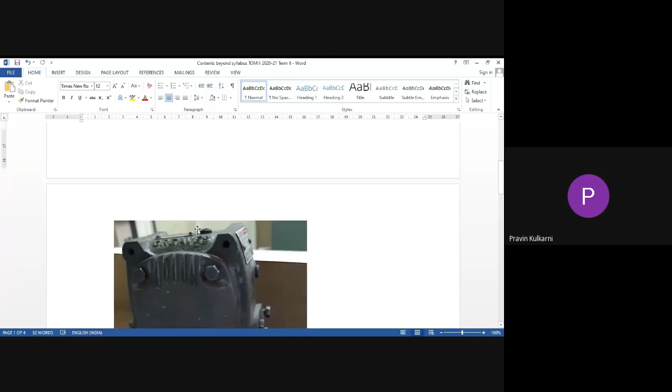So this is a gearbox, a worm gearbox. Right now you are able to see the casing of the gearbox - this is called the casing. And here you are able to see a shaft in the plane of the computer.

Remember that worm is driver, wheel is driven. So this is supposed to be the driving shaft - somewhere here, motor is coupled to this gearbox. You are able to see these bolts - with the help of 4 bolts, the bearing cover is fixed. This is called the cover of the bearing, and inside the cover is actually a bearing. So front bearing and rear bearing for the wheel, and this is the bearing cover for the worm - 2 bearings for the driver, that is worm, 2 bearings for the driven.

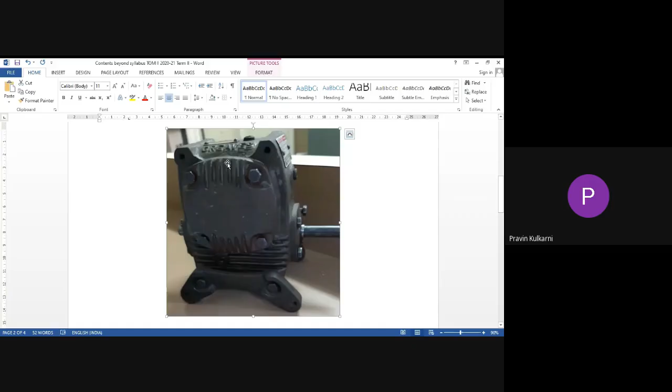Now, ultimately worm is smaller in diameter, wheel is larger, so the large bearing cover gives you an idea of the wheel which is present inside this portion. Now people normally make use of a split casing, but this is a one piece casing that we shall see.

Now you are able to see the projected parts like this, the projections. You're expert in heat transfer now, so these are actually fins - FINS - for dissipating the heat generated in the gearbox. Remember that efficiency of the worm gearbox is very low because of high friction - high sliding is there, greater friction, sliding friction. That's why heat is generated, which is to be dissipated with the help of the fins.

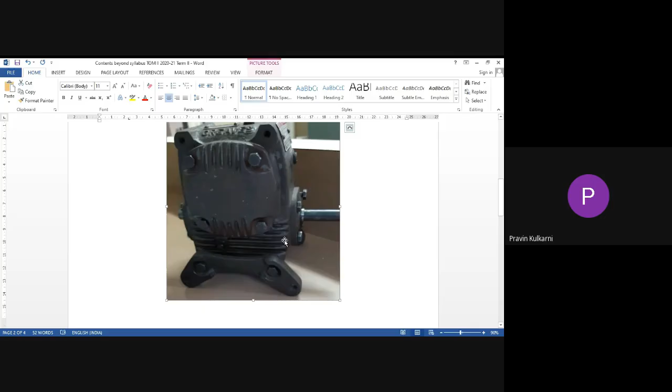Now I have already dismantled the gearbox for you, so different parts of the gearbox are here. This one is actually the worm, which is the driving member, isn't it? Remember that as far as the worm is concerned, the worm and the shaft are integral - in case of the worm, that itself is the shaft. So on that shaft, 2 bearings are mounted.

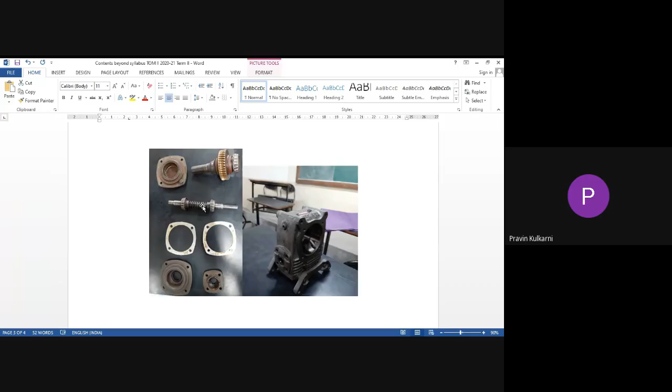Now again, selection of bearing and design guidelines for bearing will be covered in DME 2, design of machine elements 2. Let me enlarge this because you might be using your mobile phone, that's why it may not be properly visible. Now you're able to see the worm and the bearings.

So again, which bearing is to be selected, like which gearbox is to be used? Similarly, which bearing is to be used to support the shaft? Every selection is to be justified by calculations - not that randomly X bearing is to be used or Y bearing is to be used. We are engineers, we are physicists. We will always support our selection or judgment backed by calculations.

Application of science is engineering, and application of engineering principles gives birth to a product which is engineered. So remember that all these components are engineered components, isn't it? So while selecting this bearing or that bearing, some calculations are needed, isn't it?

If you ask me different types of bearing, then we have got deep groove ball bearing, roller bearing, taper roller bearing, angular contact bearing, needle roller bearing, cylindrical roller bearing - the list is huge. Probably BAJA and SUPRA students might be having greater knowledge of this thing. Now, few bearings are capable of taking radial load only, and there is another class which will take radial as well as axial load.

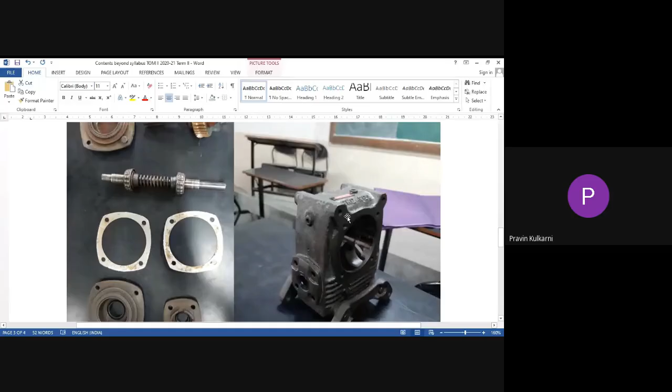Now see, this is actually the bearing cover for this wheel side. This is the bearing cover for the driving side, that is the worm. Now see, more important is the wheel. You are able to see the shaft of the wheel. In case of the worm, shaft and worm are integral. In case of the wheel, you have got a separate shaft on which the wheel is mounted.

Now remember that in case of the wheel, it is made in two pieces. You have got a central cast iron hub on which a rim made of phosphor bronze is mounted.

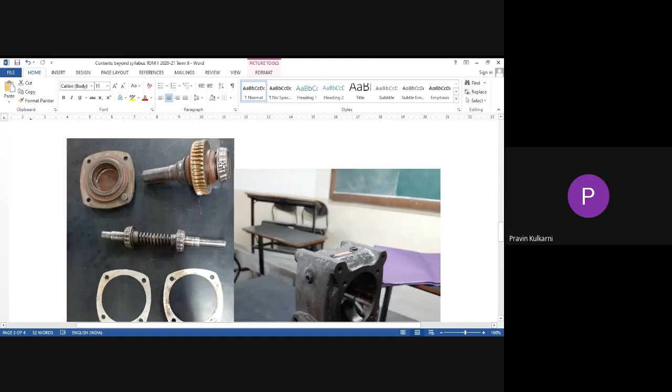And then you have got the bearings. These are the elements. And then we have got this casing of the gearbox. This is a single piece casing.

You may make use of a split casing, that is upper half, lower half. But in this case, what is done is the opening of the gearbox on the wheel side is slightly greater than the diameter of the wheel, isn't it? So how to dismantle this?

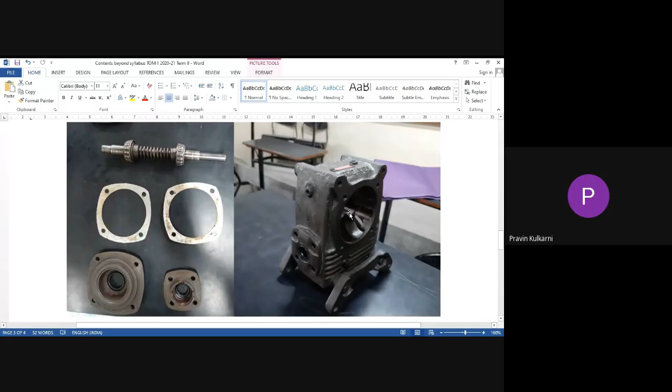Take out the bearing covers from driver and driven. So this is now opening, isn't it? You can take out the worm. Deliberately, the opening on the wheel side is large so that the large diameter, large size wheel can be taken out. Due to this large opening, we are able to use a single piece casing, isn't it?

Details we draw so that the components can be fabricated. But remember that when you draw a detailed drawing, each dimension should be specified. If a single dimension is not specified, then ultimately the person on the shop floor will not be able to carry out the fabrication. Each minute detail should be mentioned in the drawing.

Assembly drawing is meant for making assembly of the components once they are fabricated, isn't it? See, the thing is that when you go to industry and you are given the task of design engineer, there will be people supporting you, working under you, and those are ITI draftsmen.

Remember that ITI draftsmen are very expert in reading drawings and drafting in AutoCAD, because an engineering student will learn theory, many subjects, probably 10 into 40 subjects.

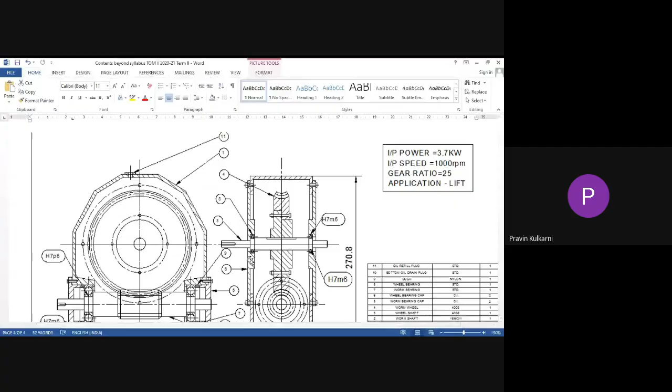I don't continue beyond this level, that is lift one gearbox. Overview of the gearbox is over. If any doubt is there, please revert back, I will wait for 2 minutes.

So today's first task is over, that is content beyond the syllabus. So let me close this. This matter is discussed.

Now, when you refer to the syllabus of each subject, some statements are mentioned in the syllabus. Those are called course outcome statements, CO statements. Remember that here 'course' stands for a subject, and 'outcome' is outcome, what you have gained, that is the outcome.

Outcome of examination will be how much marks you gained at the end of the exam. Outcome of engineering can be measured in terms of the employment you get, the package you will get, how good you as an entrepreneur would be, how good your business will run. That is outcome of engineering, or the university that you will be admitted to for your higher education, that is outcome of engineering education.

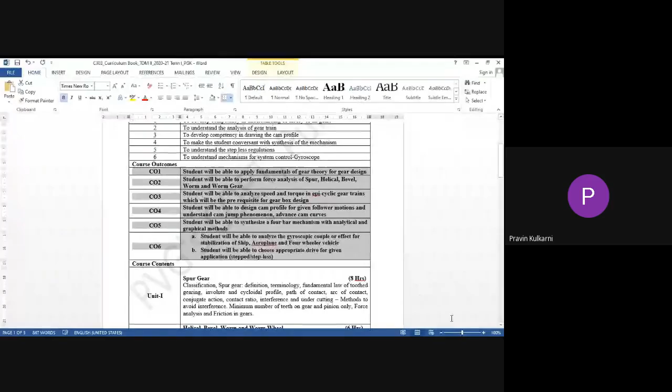So these are the course outcome statements for Theory of Machines 2. The thing is, we are following outcome based education, and have been for many years now.

So accordingly, what should be the outcome at the end of first unit is described by CO1. What is CO1 statement? You will be able to apply fundamentals of gear theory for gear design. Fundamentals of gear that you have learned can be applied for designing a gearbox for a lift, a machine tool, or any application like conveyors.

Unit 2 was based on helical, bevel, and worm gears. Accordingly, the second statement is ability to perform force analysis of spur gears. Yes, you can do it. Force analysis of helical and bevel you have to learn probably; worm we have done. That's the third unit.

Yes, you are able to now analyze speed and torque in epicyclic gear trains. We have gone through many numericals and had one experiment based on this, isn't it?

Unit number 4: yes, you are able to design cam profile for given follower motions and understand cam jump phenomena and so on. You are able to synthesize a 4-bar mechanism; many of you might have drawn the drawing sheets. Finally, you are able to analyze gyroscopic couple or effect for stabilization of ship, aeroplane, and so on.

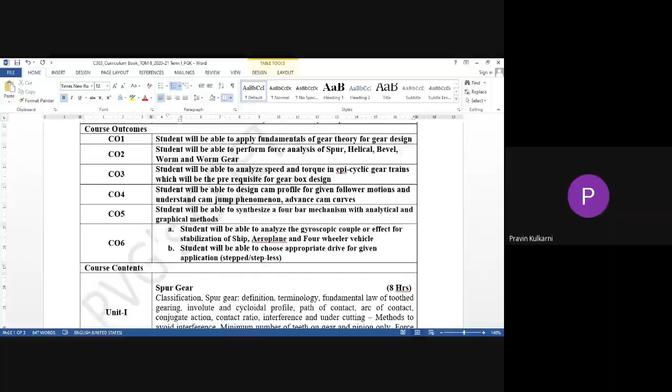Now, these are the statements, but the outcomes should be measured. That is important; simply showing you the statements will be half the task. So what I will be doing is, I will prefer to know from you how much you understood unit number 1, unit number 2, and so on. That feedback I'm going to take today, right now.

Now you have to be very honest. I am just asking you the extent to which you have gained knowledge. Don't say you have understood to the fullest extent; it may vary from person to person. You can say, for example, I have understood 50% of the first unit, 60% of the second unit, and cam profiles 100%. That is left to you. So be honest, and give the feedback based on whatever you have understood.

Nothing is compulsory; it's not that 3 is the highest rating you must give. 3 means yes, understood fully; 1 means lesser understanding; 2 is moderate. Nobody is going to check what A has done, what B has done, what C has done. You have to do it, that's all, nothing else. Okay.

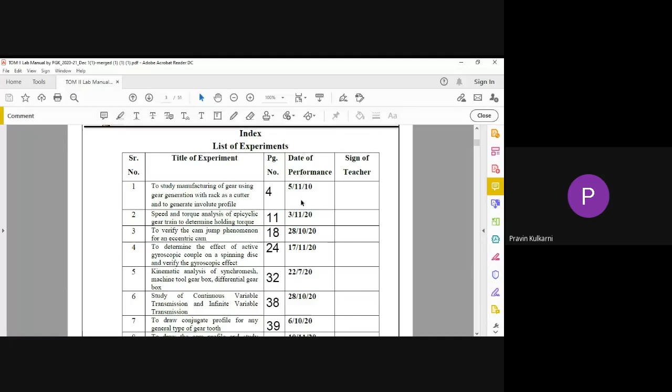Now, what I have done, you remember, dates I have already written. So on this page you have to write the page numbers, and you know what the page number is. Only thing is that for 1 to 6 we have got the write-up, okay, so accordingly numbers are already put there.

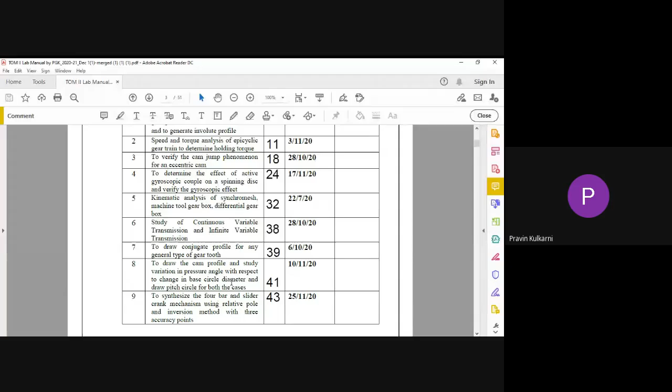7, 8, 9 are the sheets: conjugate, cam profile, and synthesis. Okay, so do one thing: you have got up to 6 the write-up given to you as a PDF copy. What you have to do is, for sheets 7, 8, 9, once you draw them, scan as a single PDF. I repeat, sheet number 7, sheet number 8, sheet number 9, once you draw it, scan as a single PDF. Now you have got 6 write-ups as one PDF, and 3 sheets as a second PDF.

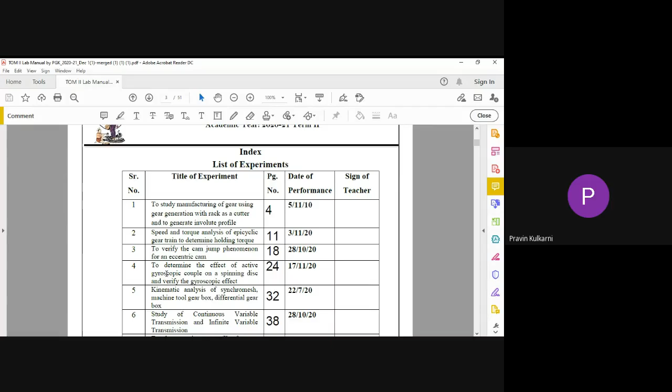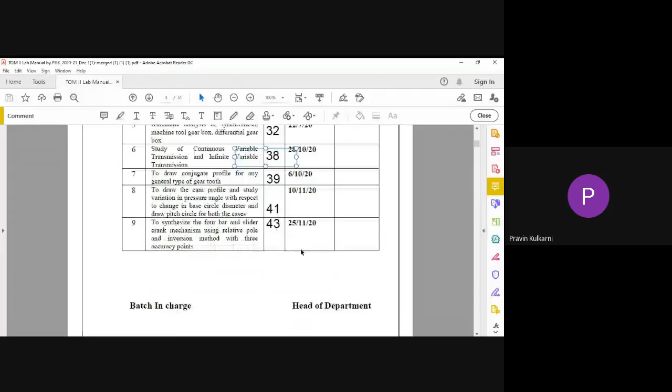You have to merge these two. Okay. Now put page numbers on the drawing sheet also, and accordingly transfer those numbers here. Okay, so this is to be done. Once you do this, then you have got either 51 or 52, whatever is the total number of pages.

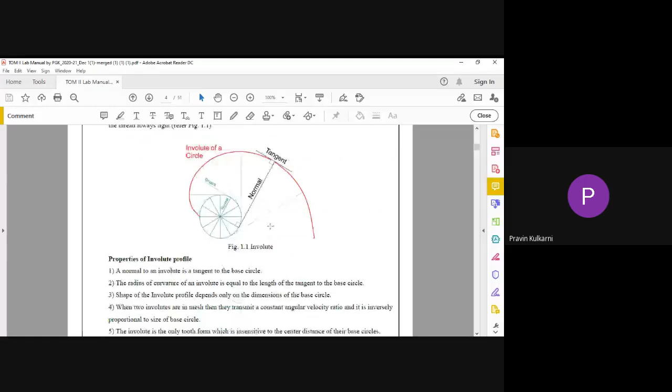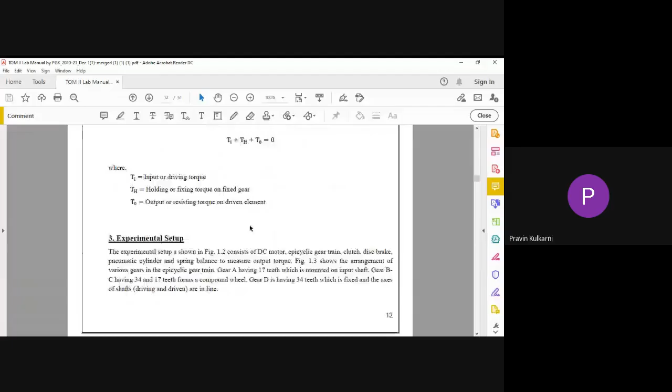Nothing is to be done for 1 to 6, everything is already there, isn't it? This is already done, this is with you. Number 2, it is already there. Everything is there, along with the calculations, along with the table, along with the outcome, output. This is already with you. Nothing is to be done, my dear friends.

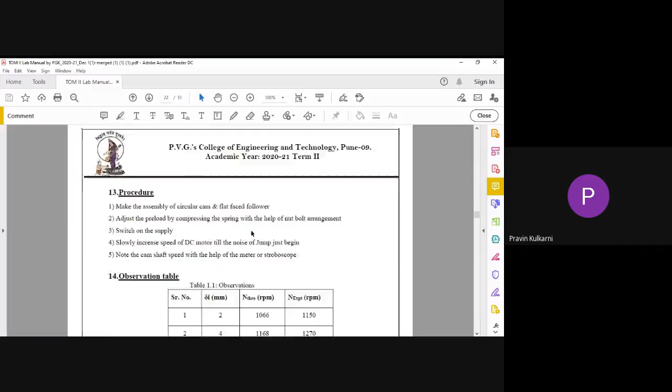Number 3, everything is there. You have got this observation, sample calculation. Remember that these are all our readings, we have taken this year. Just remember this 1066, this was the theoretical RPM.

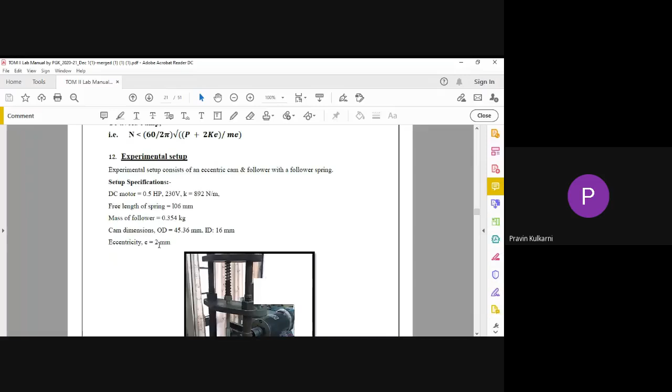How, what did we do? We have the observations: DC motor 0.5 HP, stiffness of the spring was 892, free length was 106, mass of follower is 0.354, eccentricity 2 millimeter. And we have got this formula for the jump speed. Based on this, remember that for 2 millimeter deflection, the theoretical speed was 1066 RPM. Just keep in mind, the first RPM that is going to be useful.

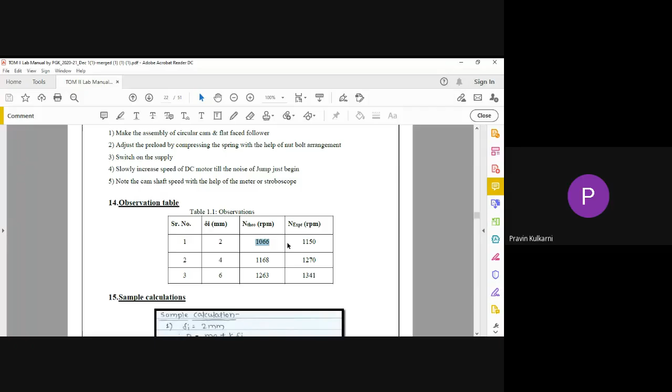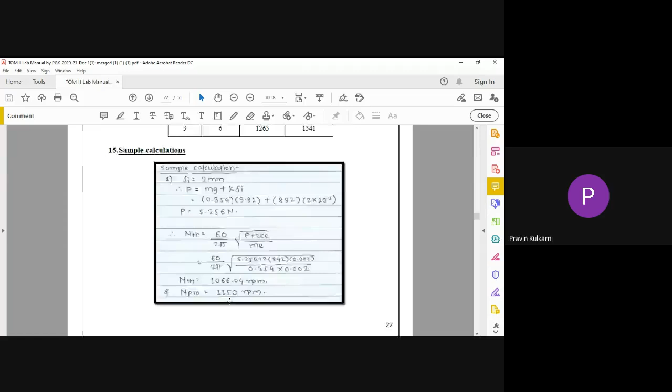1066 is the jump speed. Don't forget this. Accordingly, calculations are shown, this you can read afterwards. What is the jump speed? 1066 RPM for 2 millimeter deflection.

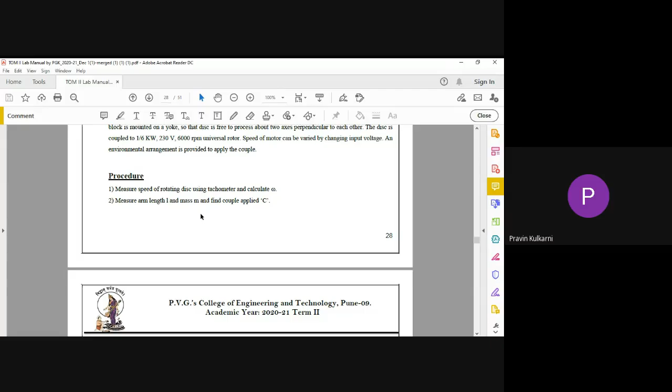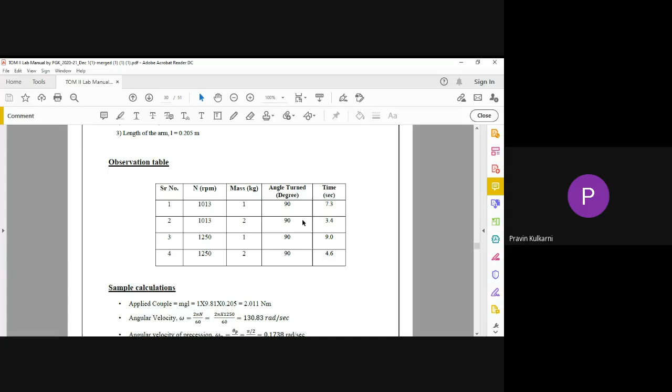Then gyroscope. Again, everything is there, one should not worry about Term 2 submission. I have to write this, I have to write that, because I also understand that you have got 5 subjects, heavy submissions, lesser time, you do not meet with your friends, everything is online. But not to worry about Term 2, everything is there. You have to devote a lot of time for study. You have to study this, that is more important. Writing is not important. Understanding these signs, remembering is more important.

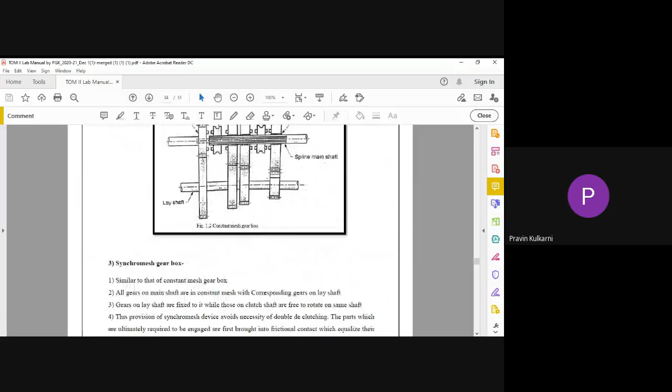That's why everything is there. Okay, then you have this result. If these gearbox study experiments, it is left to you, you can understand this, there should not be any problem in this. And this is CBT, yes, nowadays we make use of CBT. Just read out this, all is theory.

Now, 44 pages are with you as a single PDF. The second PDF, you will scan these 3 sheets. Don't forget to write conjugate as the 7th experiment. Title is to be written. This is to be done online. Once you merge these 2 PDFs, then you will be having this as blank.

The top will be blank. You will be having the sheet. Above that, write experiment number 7, title of the experiment as per the syllabus or as per the first index that you already have. This is very important, you must write this. And write this also, your name, number and division, conjugate.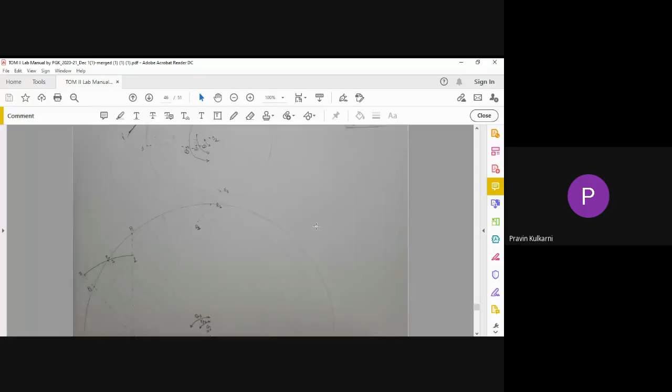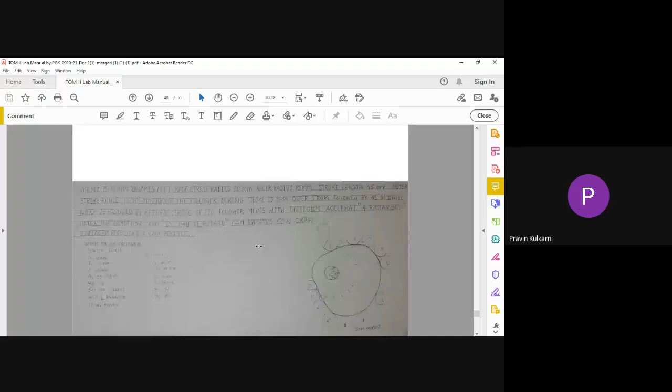Then you have got CAM profiles. Again, you have to write this online using some tool over here. Experiment number 8, title as per the syllabus. And experiment number 9, title of the experiment and this thing. That will be the end of the file.

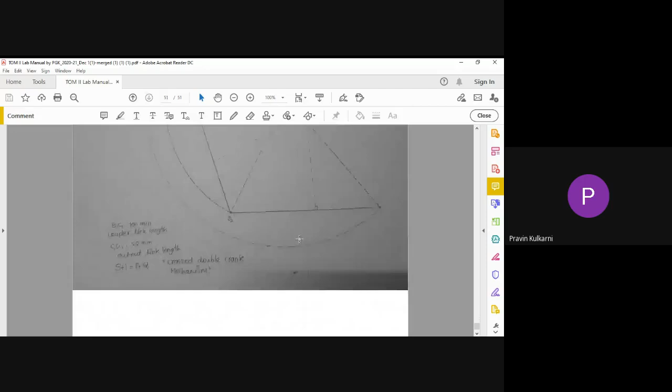Any problem in this, like you have got the synthesis for 4 bar and the crank slider? I hope you have got the Word files with you for synthesis. Anybody has got some problem in this experiment, synthesis of mechanisms, please revert back. This is the best platform to discuss it. Try to discuss it right now, it is very simple, it will take hardly 10 or 15 minutes.

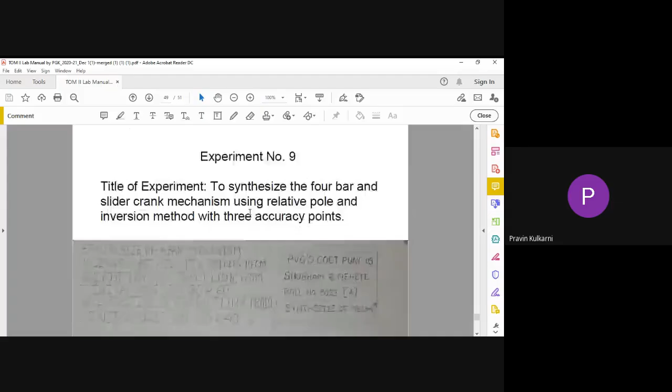Now, this is all about 51 or 50 pages, whatever the case. Now this is to be renamed like this: you will write this as, let's say my roll number is 1, 2, 3, 4, followed by your name, followed by PE, Mech either A or B, underscore, TOM II. Are you getting my point?

You have to, let me stop sharing. You have to rename this file as mentioned in the chat box. Please refer the chat box: your roll number like 1, 2, 3, 4, your name Pravin Kulkarni, your class and division, and TOM II. I think I have made everything clear to you. Once you do this, you will be having one PDF ready for submission.